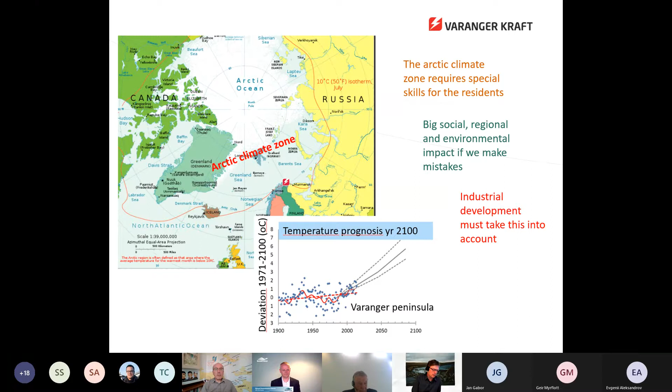There is a picture here on my slide that shows the forecast for temperature increase in our area. That is the highest in Norway as we speak. Today it's 13 Celsius outside in the shadow. Maybe we are of course very happy for it, but in the big picture we don't know what's going on. So we have to be careful when we're doing big investments in industrial projects and environmental projects as well.

We do also wind farming, as I said earlier. We do hydropower production in the river, the border river of Pasvik, where we are cooperating with the Russians and the Finns to provide electricity to this area, and also in Russia. There are other projects, but I will speak only on the wind farming we are doing in Raggovidda. It's the top of the Varanger Peninsula, nearby the village of Berlevåg.

We found the site in 2008. We developed it since 2010, and we have been producing wind power since 2014. It's one of the most effective wind sites in Europe, and as Carlsberg says, probably one of the most effective wind sites in the world, perhaps, on land.

There is a whole big capacity, yes, but the power grid is not so efficient, so we haven't been able to use the whole concession we have. In November, we will be using 50% of the total permit we have to produce wind power in this area. But we are looking forward to using the other 50% to produce electricity and hydrogen.

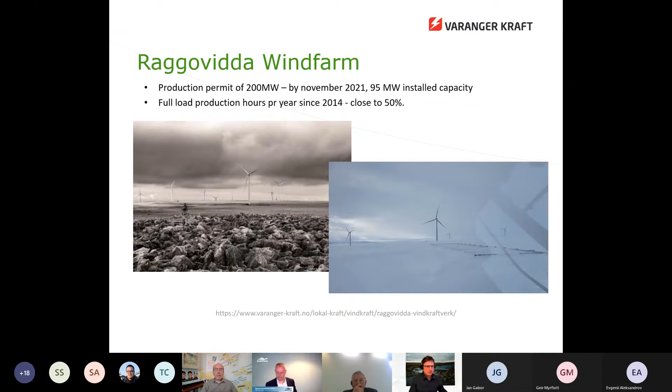This hydrogen project started on the fact that we have about 100 megawatts of stranded wind. We started in 2013 to analyze how to use the rest of this 100 megawatts, and then we penciled into the hydrogen concept. In 2018, we competed in the Horizon 2020 program with a pilot, a kind of remote autonomous production facility based on wind power.

We were selected from the EU program, and now we are trying to produce it. As we speak, we are installing the facility and production facility in the building, and we hope to be the first to produce green H2 hydrogen from wind power on a remote control basis from June this year.

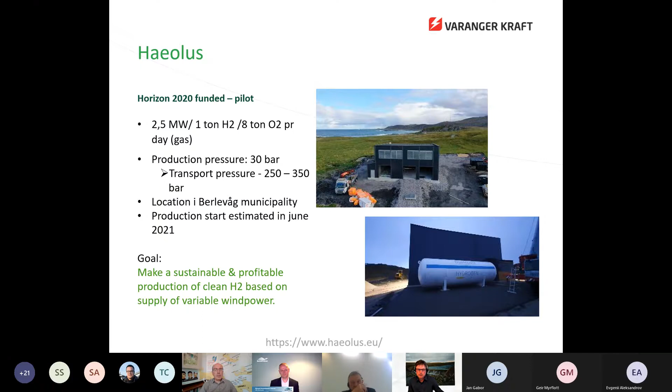And if we can make this happen in a profitable way, there is the possibility to copy this study and this project elsewhere, especially in areas where you have a lot of grid capacity problems.

Our partners are in Europe, and during this pandemic it has been a very difficult way to cooperate, but we have been cooperating online and in the digital area, and now it starts to open up. The first equipment has been shipped to Berlevåg, and we are starting now to install it in about two weeks. So I hope to present this project and our production in August, if anyone is interested.

Then we will show how to produce hydrogen by electrolysis, PEM electrolysis, in August, and show how to use it in a productive way with a lot of remote control systems. But we are not stopping then on hydrogen because of the willingness to pay in the market, and also the logistics of hydrogen in gas form.

We are trying now to innovate further to the ammonia product, and we have connected with several big partners. The GAB project, as we call it, green ammonia from Berlevåg, will create a new value chain based on our renewables and our knowledge in energy production. We have also tested the customers' willingness to pay, so we have been joining forces with major industrial players in the value chain. We are now doing the concept study and hope to make the investment decision in the third quarter of this year.

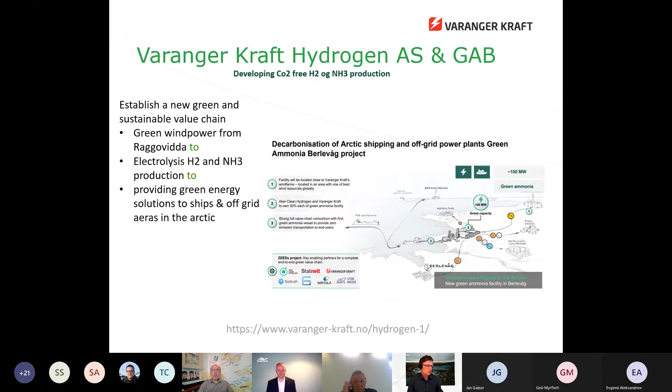We also try to take care of the communities, so we have cooperation with the local communities where they are interested in the waste energy, heat and oxygen. There are 4 concrete projects now trying to develop businesses near our facility if we start up. The key issues are to handle capital, competence, and community in everything, because this is a small community, and when building an industry like that you have to be careful with the environment and the communities, and also how you use the capital provided in this area.

It's very, very complicated because there is not modern industrial infrastructure in this area, so we have to build it from the start. Thank you.

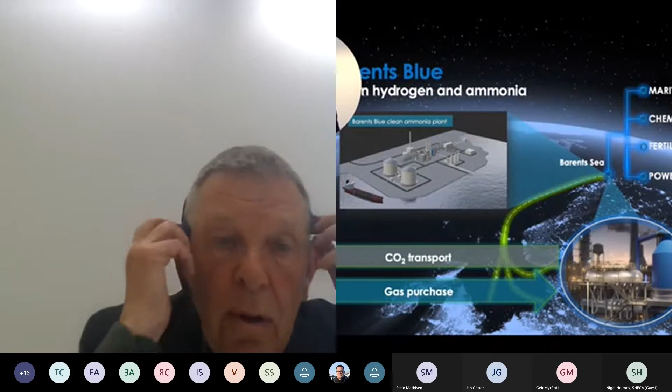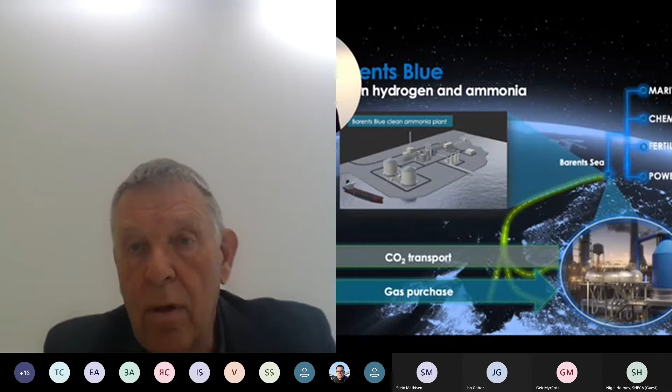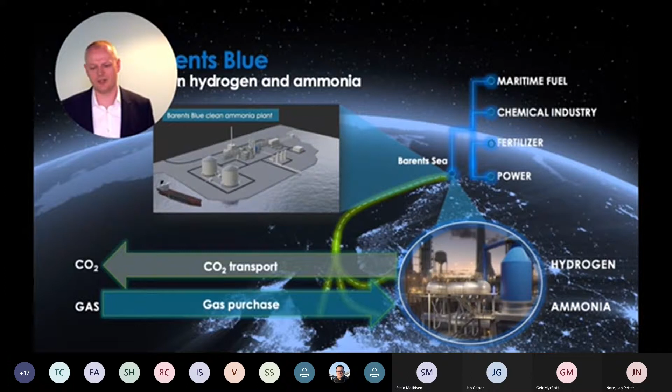Just to introduce you to the project: we are located in Troms and Finnmark, in the Hammerfest Nordkapp area. We will purchase gas locally from local gas sources, and create a gas reforming facility which will reform this gas to syngas, to CO2 and hydrogen. We export the CO2 offshore, and this CO2 will be stored in a local storage. The output from the plant will be mainly ammonia — hydrogen will only be within the pipes.

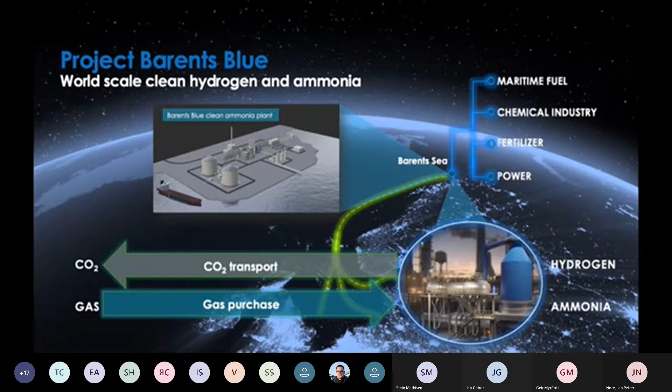We will market this ammonia towards several markets, both in Norway and abroad, including the maritime fuel market, which I guess many have heard of, and also the chemical industry, fertilizer industry, and power industry. The facility we are developing will be one of the biggest ammonia plants in the world, but it will be clean — at this point in time there are not a lot of clean large-scale ammonia projects. Our ambition is to develop the most carbon efficient and energy efficient ammonia plant in the world, and Finnmark is a good place to do just that.

We try to make it a zero emission facility, capturing all the CO2. We try to make it self-sufficient on power, retrieving some renewable electricity from the grid. We have a high focus on sustainable solutions and circular practices, and it will be fully automated to maintain high availability and high production. We will focus on a low noise level and a very gentle light design, and on how the plant will actually look, so that it becomes a landmark — something to be proud of, since we expect this facility to be the first of its kind in Europe, a place to visit and get attention.

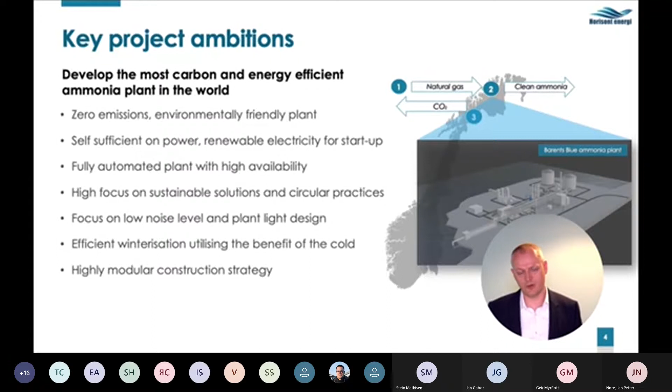Part of the development of the plant is very efficient winterization, maximizing utilization and the benefits of the cold environment, because such a facility involves a lot of cooling, so being in a cold place has its benefits. It will also be a highly modular construction strategy, meaning we will construct modules at yards and bring them to Finnmark for hookup, commissioning, and startup.

Just some data. We will produce about 3,000 tons of ammonia per day. I guess the biggest ammonia plant in the world currently is about 3,500 tons in development. It will be above 1 million tons per year, and the CO2 capture rate will be above 99%.

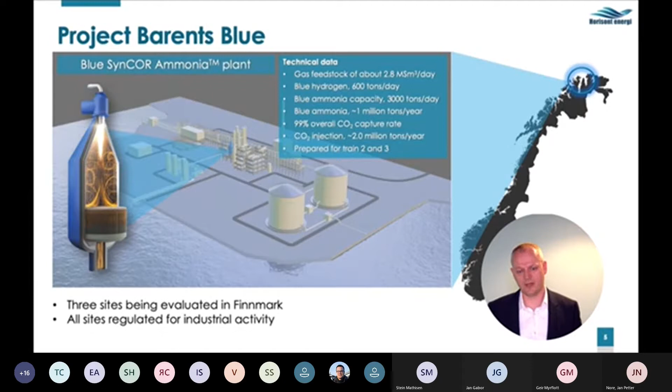We will develop a local CO2 value chain. We will bring the CO2 offshore and store it in a carbon storage offshore off the coast of Finnmark, developing a local CO2 value chain.

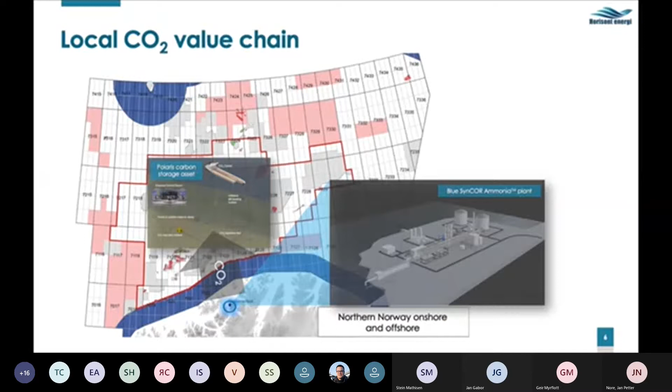This is an illustration of the CO2 storage concept we are working on, where we have a very simple development with a cable from shore, a utility and well system, for which we will house the wells of the system down into the structure which will store the CO2. There will be an offshore offloading system where we will have a CO2 carrier vessel dock onto it and inject the CO2 into the reservoir.

We expect it to be about 2 of these vessels. The system is possible to move to other storages later, and we can expand the capacity by adding wells and adding vessels. It's a good solution to also mitigate some of the risks that you have in the beginning, especially in the beginning of the operation of CO2 storages.

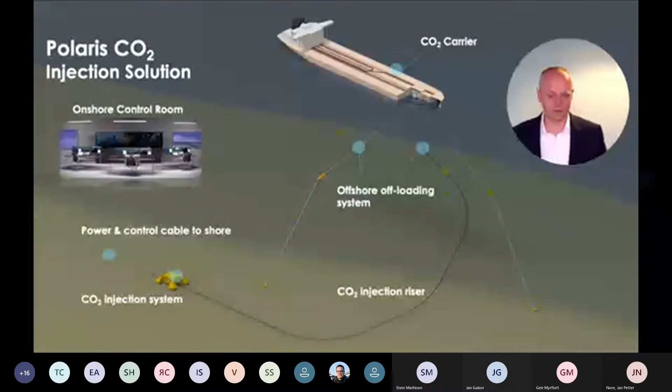The carbon storage asset is about 100 kilometers off the coastline. It's a very high quality reservoir, a large structure, and we plan to inject about 2 million tons in the first phase. We already see an estimate above 100 million tons of estimated storage capacity.

So in developing this project, I guess having the carbon storage is a key part. Now also, as we have mentioned, is to have a solid land site and also to have a solid processing design.

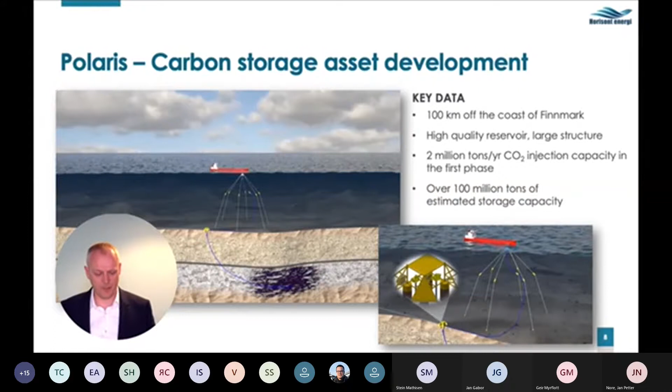To summarize, I would say that we are developing the first greenfield large-scale clean ammonia plant in Europe, and currently, as far as we know, it's the most carbon energy efficient plant in the world. The Barents Blue project will deliver about 1 million tons of clean ammonia per year, and that's about 5% of the traded ammonia market today.

And we will inject 2 million tons of CO2 back into the storage. In later phases, it's possible to expand and double and triple the injection capacity. Based on this project, we will create a long-term carbon-free industry in Finnmark.

I can also mention to conclude that we see a lot of synergies with other projects of similar kind, green and blue, in Finnmark. I think Finnmark is a great area to develop this business in Norway. So thank you, finishing a little bit ahead of time.

Thank you very much, that was very, very interesting by any standards. Most people, when they talk about hydrogen today in Europe, talk about green hydrogen. And here you come and actually put on the table one of the world's largest blue hydrogen projects that is ammonia driven. This is quite amazing, and what you have described is very exciting. I don't understand why there isn't more discussion about this in the world. You are talking about a world-class kind of concept. Why don't you think there is more big headlines about your project?

So this project is first of a kind, where we are preparing for using hydrogen in the rolling mill at CELSA—I'll show you a picture of that later. We are aiming for establishing a complete value chain for green hydrogen. In the first stage, we'll use it for industrial use at CELSA, but we may also have other activities in line with this project. The end product will be the world's most climate-friendly reinforcement steel, and we aim to reduce emissions by 60% from the current process.

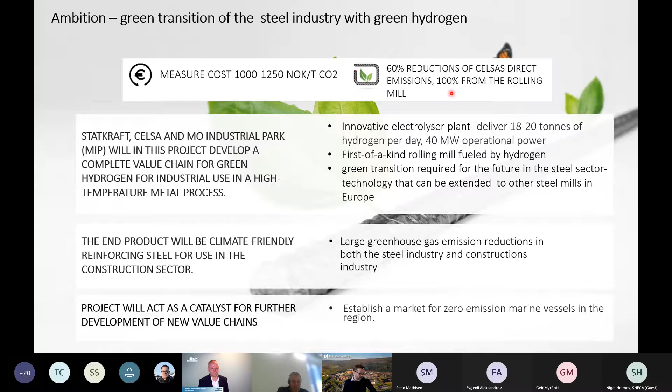So the value chain is like this, pretty simple. Statkraft does the hydrogen by water electrolysis. When that is offered in a surplus area close to the actual water production, it will offer the very best LCA standards of the finished products, which will be reinforcement steel at CELSA. They will in turn do some furnace upgrades in order to use hydrogen instead of CO gas and other fossil sources as they're using today.

So the project has different work packages, and of course we need to look at the risk and the CapEx, OpEx, which is kind of an issue these days. Hydrogen isn't exactly in a position to have very high funding from the funding schemes as it is today in Norway, so you have to look to Europe in order to have some real support for the hydrogen electrolysis production itself. But we are in an established infrastructure and looking at circular gains when you are established together with other companies.

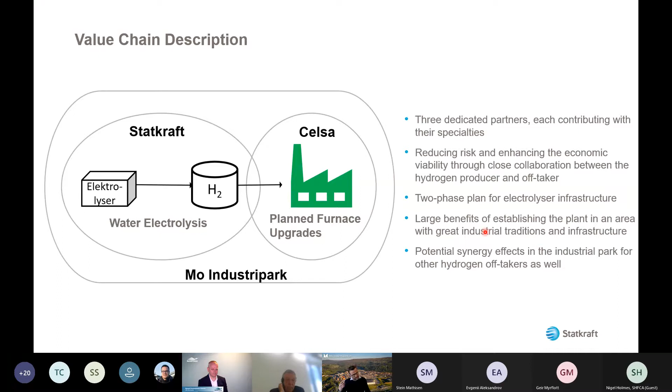So this is the electrolyzer plants. Statkraft has signed a letter of intent with Nel, and they are of course looking into how to improve power consumption, or reduce the power consumption, lower the OpEx and lower the CapEx. This is basically probably one of the core issues that all of the green hydrogen producers are looking at. But on the other hand, green hydrogen will have a significant role in the future hydrogen market, probably also together with blue and other hydrogen production with different sources.

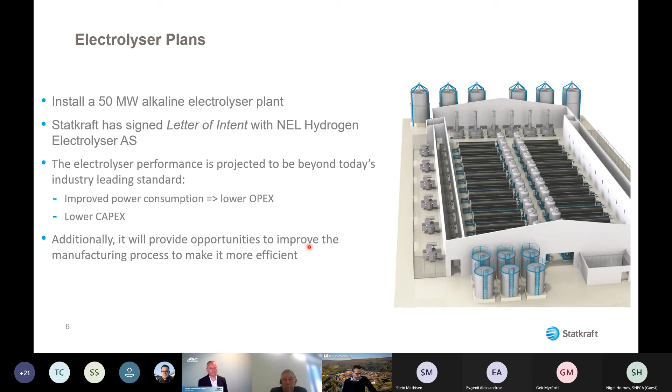So this is the planned upgrades on the furnace, and here you can see the steel billets being preheated before it enters the rolling mill. This is where we want to use hydrogen instead of CO gas or fossil fuels. So I showed you the picture, there are two main processes, and the rolling mill has the potential of reducing the emissions by almost 60,000 tons each year by changing the fuel to hydrogen.

What is a bit complex today is when you're looking at the funding schemes: hydrogen production is already commercialized, and this rolling mill is operating. But when you're presenting these known technologies put together in a new way, aiming for producing products in a new way, it's a very high degree of innovation level. But it still doesn't fit into the Norwegian funding schemes because they're looking at it as hydrogen production and an established process. So that is what we're looking into — how we can have support for the CapEx, OpEx, and we're looking to the European funding schemes for the moment.

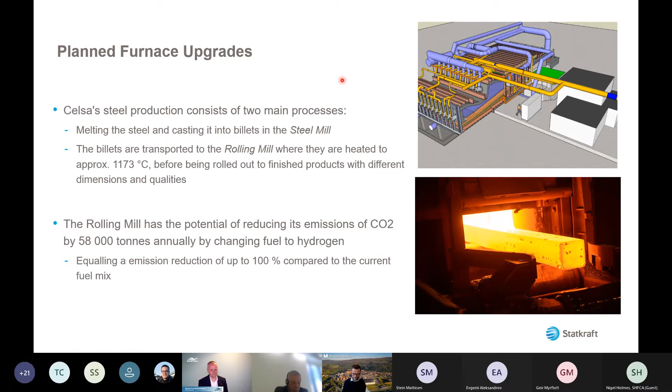In the longer run, we're also looking into how to produce other areas or markets for the hydrogen, because hydrogen production itself isn't a lot — there aren't a lot of ripple effects by producing something and just exporting it, because there's not a lot of labor, not too much logistics, but it's power consuming. But if you look into how hydrogen can support other areas like CCU, use of CO2 for creating new products, for instance e-fuels or proteins, then you will have a very scalable industrial opportunity by using hydrogen together with captured CO2 from local emission places.

We're also looking into how CO2 or hydrogen can play a role in heavy transport and ferries, for instance. So in total, we see that Statkraft may have the ambition to be able to establish between 200 and 300 megawatts of green hydrogen production in this area, which is a surplus hydropower area offering very favorable both power and grid pricing, also then in an already established industrial environment with other companies supporting circular business models.

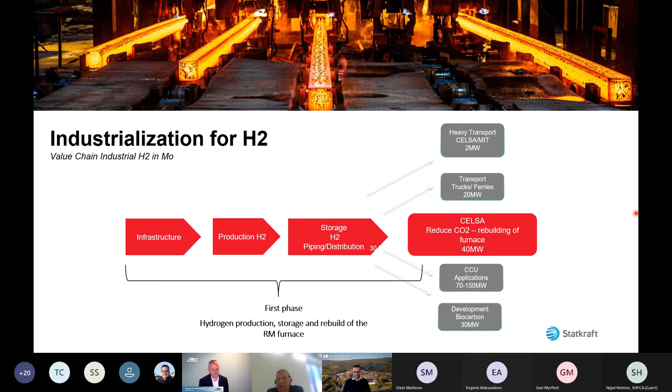Thank you very much. Any questions in the chat? No, nothing. Any comments from your fellow panelists? Do you have any kind of things to say?

Bjørgulf, how does this look to you as a sort of industrial man interested in creating more activities in Northern Norway? Do you think this is interesting? Yes.

You must unmute. Okay, thank you. Yes, yeah.

Yeah, I think this is also a very interesting project, and I think that the real challenge with most of the hydrogen projects is to fully establish the value chain — both the supply of renewable power at a steady level, and also the output, getting a sink that's always there when the hydrogen comes. So establishing this and building it up like they do in Mo, I think it's a very correct strategy, and then you can expand from there with new value chains that are more external to the location.

So I think most hydrogen projects need to start the way that Mo is doing it, comparing it to what is done in Berlevåg, where you have ammonia. Ammonia is a big market today, so you can place the volumes there if you can compete on price. But I guess the Mo project is quite a model project of how to industrialize this.

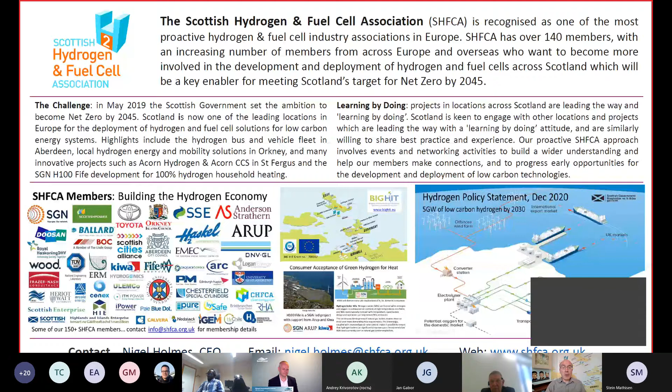Very quickly about the association: we've got about 150 members, academic, industry, and also local and city authorities, bringing the activity together that we need to make this all happen. The backdrop of the targets: these are the carbon reduction targets for Scotland, so everybody concentrates on net zero, 100% greenhouse gas reduction by 2045.

Actually, the one that is probably most difficult is the target for 2030, which is a 75% reduction in greenhouse gas emissions, which also includes emissions from shipping and aviation. So it's a bit of a stretch target.

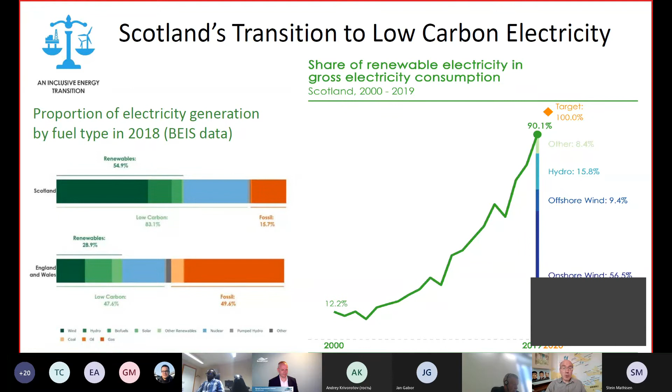The heat demand, as in most countries, fluctuates massively throughout the year. In Scotland, one characteristic of heat is that most of it is provided by fossil fuels. For example, 85% of domestic heating comes from natural gas in Scotland. So we have a challenge of how we decarbonise heat as well as decarbonising electricity and transport.

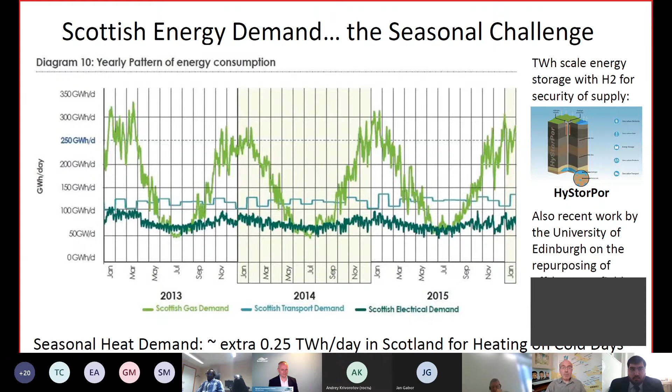So the 4 projects I'm going to talk to you about: we're starting in Fife in Methil, moving up to Aberdeen, then to Orkney, and then to Cromarty.

Over the past 10 years, the key thing about this project is it's provided a lot of education and outreach to pupils and students in the local area. One of the speakers earlier mentioned the importance of community, and I think we must never forget that. It's about trying to establish the link between the technology and the community, and that's what this project has done, setting the foundations for other projects.

They brought in a fleet of hydrogen vehicles about 5 years ago by scaling up the production of hydrogen on this site. But the next step is the real challenge.

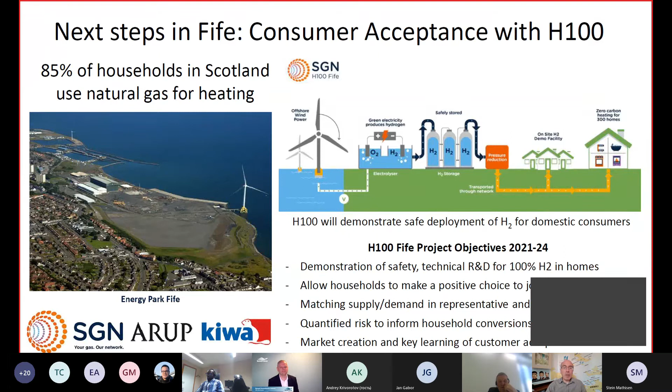They will add in a hydrogen distribution network, and consumers will be given a choice: do you want to stay with natural gas, or would you like to try green hydrogen? So it's a big trial, both of the technology and of public acceptance of green hydrogen for heat.

And if it works, then in a couple of years' time, this view of Methil in Fife, the houses you see on the hill, some of them will be heated by green hydrogen from the wind turbine you see in the middle of the picture.

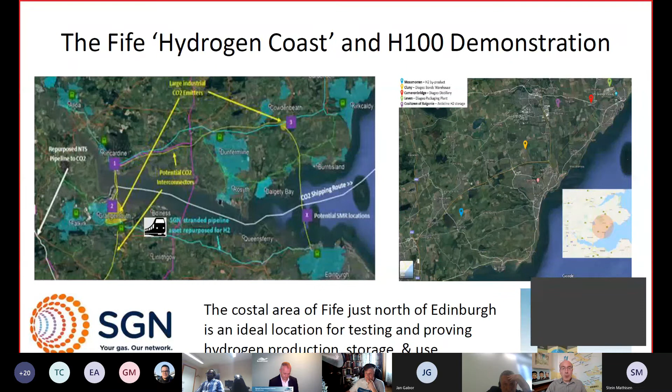Also in the Fife area, just up from Fife, is the Grangemouth area, a big industrial area. There's work going on to see how you could connect together potential areas of hydrogen production, also shipping of CO2 out into other areas where it could be sequestered. So again, this was mentioned earlier, the importance of looking at blue and green hydrogen.

And this is where Aberdeen comes into the picture. About 150 kilometres up from Edinburgh, Aberdeen, the traditional oil and gas capital of Scotland, of the UK, is now making a transition from oil and gas to clean energy.

As part of that, they've been involved in various European projects. The FCHJU, as already mentioned, Aberdeen has been very successful with the hydrogen bus fleet, which came in and started operating in 2015. They've travelled 1 million kilometres, carried a couple of million passengers, and are now starting to reap the benefits from the early refuelling station.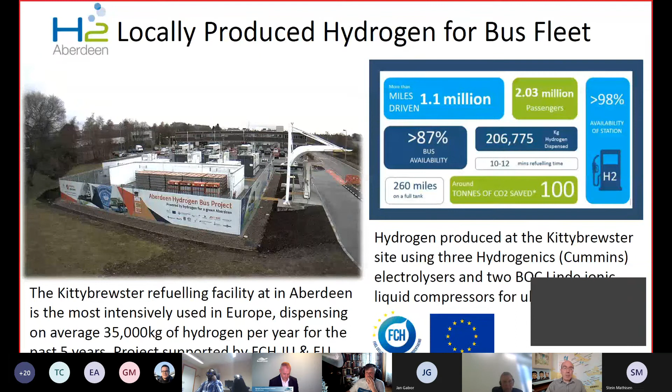This is the refuelling station that has been used for the buses, proving the operational reliability credentials of the buses. Aberdeen is now replacing its first fleet of buses, the 10 single-decker buses, with 25 double-decker buses. The interest in hydrogen buses has increased, and they're starting to expand that fleet using hydrogen produced locally.

But it's not just about the buses, it's about where does the hydrogen come from? In the future, we think this will be coming from offshore wind, coming into the harbour in Aberdeen, probably by pipeline. And they're now starting to think about the other uses this hydrogen could be used for, for example heavy-duty trucks as well as the buses, possibly trains, but also when it comes to actually supporting the building of the offshore wind turbines.

The boats that currently take the workers out to the installation are using fuel, diesel typically, and we believe these could be replaced by hydrogen. So this is actually a boat which is coming onto the market very soon for actually moving service engineers from the shore out to the wind farms for construction and for maintenance in the future.

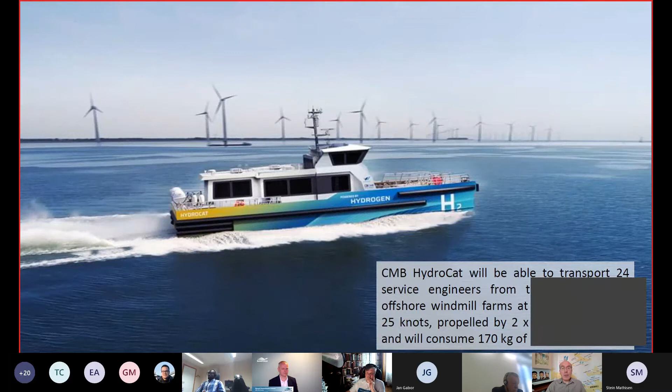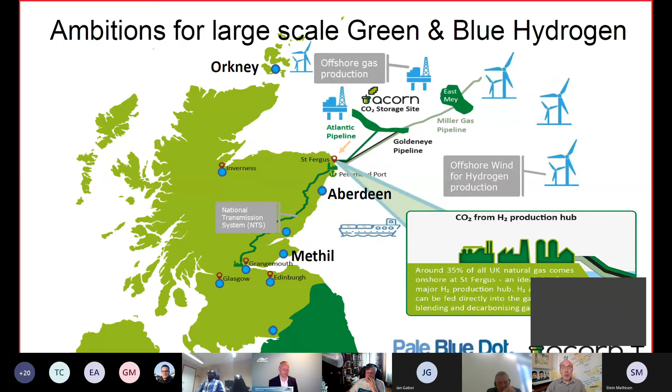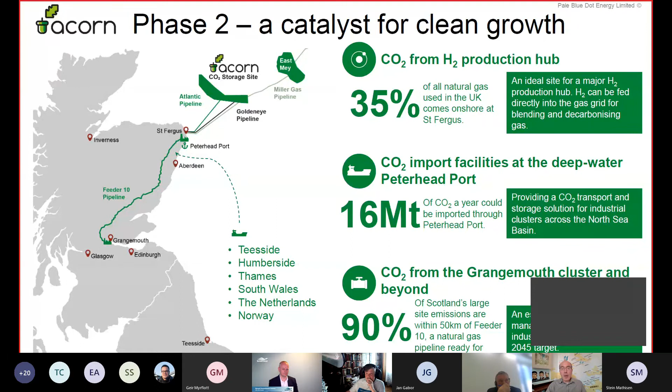Going forward, we see the challenge to start off with will be scaling up the renewables quickly enough to actually achieve the economies of scale. And for this reason, there is also work going on in Scotland with blue hydrogen at a location called St Fergus. The project is called the Acorn Project. This is very much about starting to scale up the production of hydrogen from natural gas, blue hydrogen, using the carbon capture and storage that's been mentioned earlier. And with that, actually getting the scale that brings the cost of the hydrogen down, that allows it to be used in other applications, in particular industry and for heat.

And the challenge will be actually not just how we use it locally, but going forward, potentially starting to export this hydrogen, as the comment from Russia, exporting using pipelines and shipping. We believe the pipelines could be really important. This has been recognised also in Europe, for example, with the Hydrogen Europe study that proposed the national hydrogen backbone, a transnational hydrogen backbone for Europe.

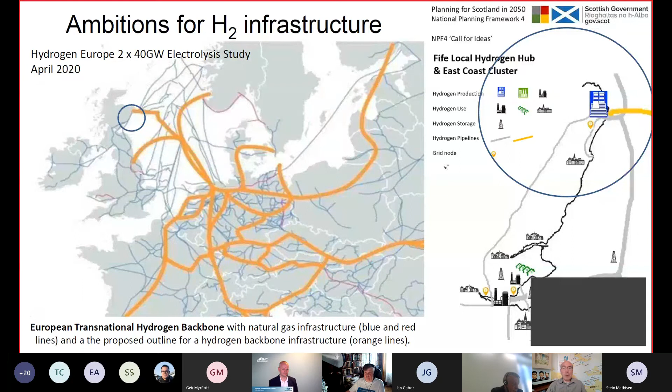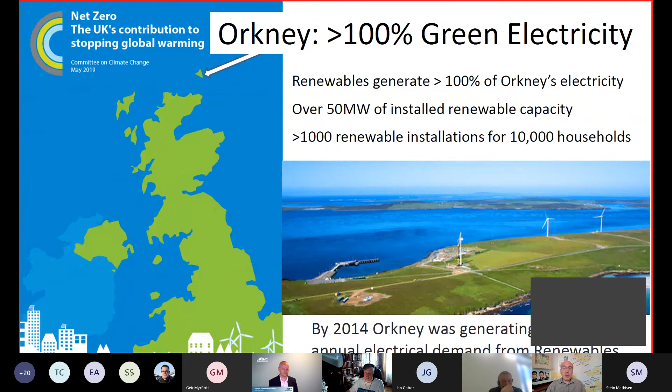But from big scale to small scale, local scale, up to the Orkney Islands. This is an area in the UK which has been probably ahead of most in terms of achieving a high amount of renewable energy, 100% green energy by 2014. But that brought its own challenges. When you look at the schematic here, you can see some of the islands that have wind turbines, but they didn't have enough demand, or the connections weren't strong enough, so often the wind turbines were being turned off, curtailed. I think that was mentioned earlier as well, stranded wind assets.

And the use of the hydrogen is actually to start to use that stranded asset more effectively, to use some of the hydrogen for the community projects. So on the island of Shapinsay, the community school will be using the hydrogen for heat, but they will still have more than they need.

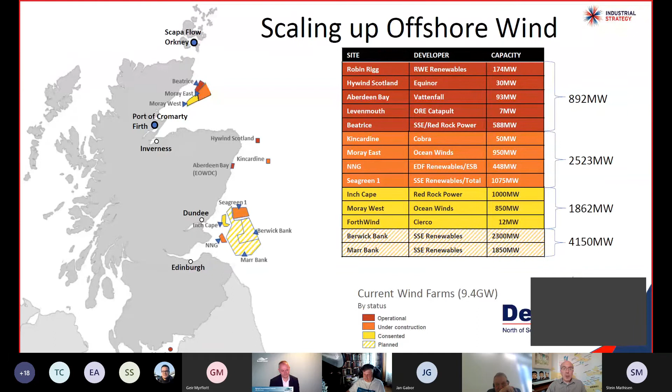And finally, the port of Cromarty, already being used for offshore oil and gas service and maintenance, we'll see that becoming a hub for green hydrogen support and maintenance, but also for green hydrogen use, linking into the scaling up of offshore wind. A lot of offshore wind is starting to be installed around the east coast of Scotland. The target is for 11 gigawatts of offshore wind in Scottish waters by 2030. Locations like Cromarty will be hubs that can actually bring in that electricity, turn it into hydrogen, and use it potentially in local areas.

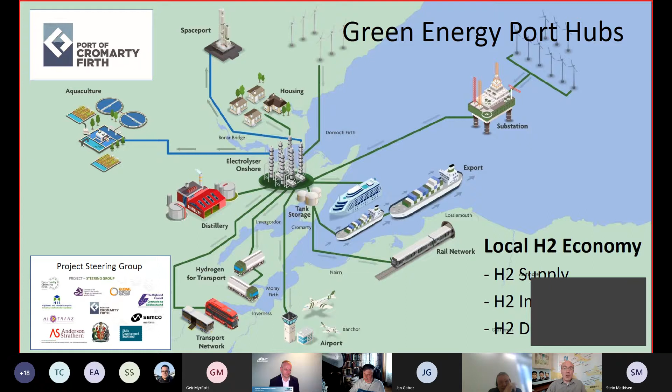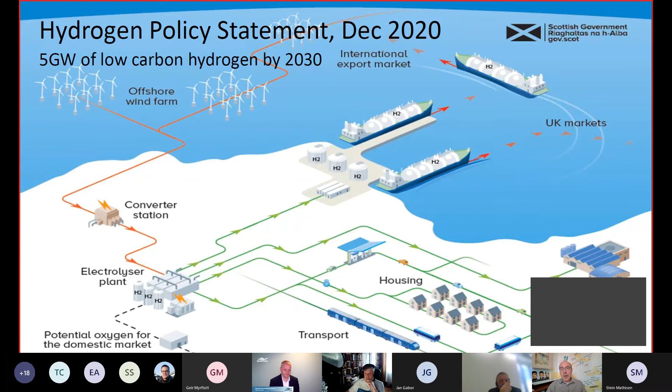And we're thinking of distilleries as one of the early markets, but also going into heating and transport in local communities and cities. And this is part of the Scottish Government's hydrogen policy statement, using that opportunity to overproduce green hydrogen and to export that into international markets, either by ship or by pipeline.

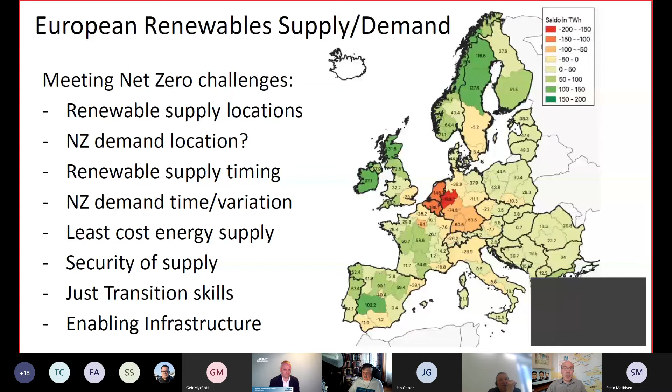And when you start to look at the demand, very much in the centre of Europe, this is a really nice illustration of the locations around Europe which can produce that renewable energy and turn it into a commodity or a product like hydrogen and move it. And ultimately, this will help us all to achieve the target of net zero.

So very quickly, hopefully that's given you a sense of what's going on in Scotland, how that fits into the wider picture around Europe. And I hope later this year we will actually be hosting the COP26 Climate Summit, and we might see some of you in Glasgow for further discussions. Thank you very much for listening.

Brilliant. 12 minutes. Good. Okay, so hopefully now, if I can work out how to unshare my screen, I'll give you back control. There you are.

Very nice, I must say it's very impressive, what you are actually managing to do in Scotland, or certainly what you are planning to do. And the question is, you basically gave us a lot of different kinds of initiatives. Can you say whether any of these are really what the government is going most for? It's a little bit like shooting with a shotgun, there were so many different things that you were touching on. Is the government saying this is the most important of all of these projects?